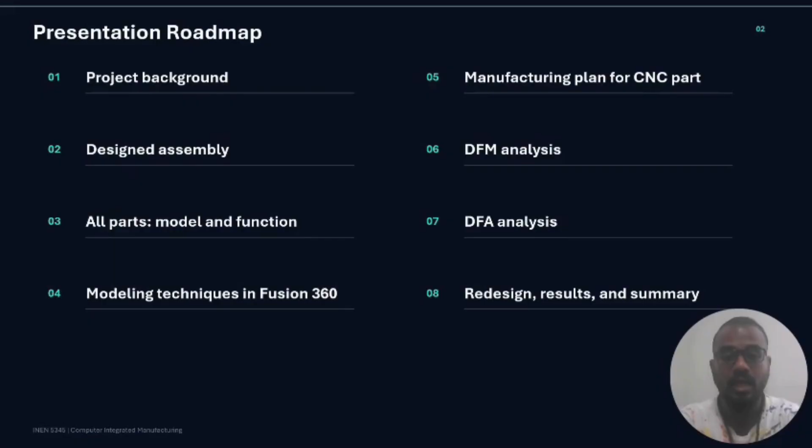The presentation roadmap is given: the project background, design assembly, all parts, model functions, modeling techniques in Fusion 360, manufacturing plan for the CNC part, DFM analysis, DFA analysis, redesign, results and summary.

The project background and the problems: why the standard bowl is limited and why we chose this ergonomic modular pet bowl. The problem we identified is that most standard pet bowls are fixed in size and fixed in height. Usually a pet bowl is placed directly on the floor. This may work for some pets, but it doesn't support every breed comfortably.

For example, small pets such as cats, chihuahuas, and dachshunds need lower access and smaller bowl geometry. Medium and large dogs such as Labradors, Golden Retrievers, and German Shepherds may need higher feeding positions. Giant breeds such as Great Danes, Irish Wolfhounds, and English Mastiffs may need even more elevation.

One of the observations behind this project was that a German Shepherd may struggle when eating from a bowl placed too low on the ground. The dog may reposition its body multiple times to access the food. This creates an opportunity for an ergonomic and adjustable feeding product. So our proposed solution is a modular pet bowl system that allows the user to adjust the height and select the correct bowl size based on the pet.

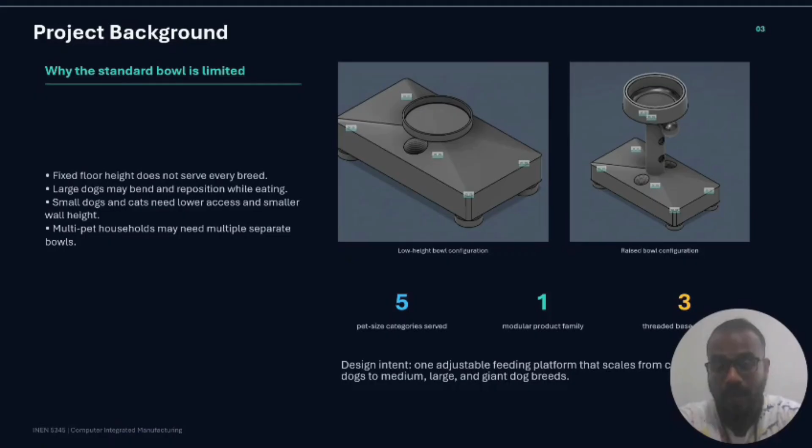For the course deliverables, we made a model consisting of more than 10 parts, all done using Fusion 360 to create the CAD parts and then putting those parts together in the assembly. This project demonstrates some of the features of CAD and Fusion 360 such as extrude, revolve, shell, holes, threads, fillets, and joints. There is also the manufacturing plan for one CNC machined part. Also, DFM, design for manufacturing, and DFA, design for assembly, were considered when planning this modular pet bowl design.

With the objectives of this project, we intended to give the customer a high-value product. The first benefit of this modular pet bowl is the key value of this product, that is height flexibility. Dogs from the Chihuahua to the Irish Wolfhound would be accommodated by this product. The two bowl sizes also make further accommodations for both small and big dog breeds. We have also given weighted support to prevent any accidental tipping caused by the pet.

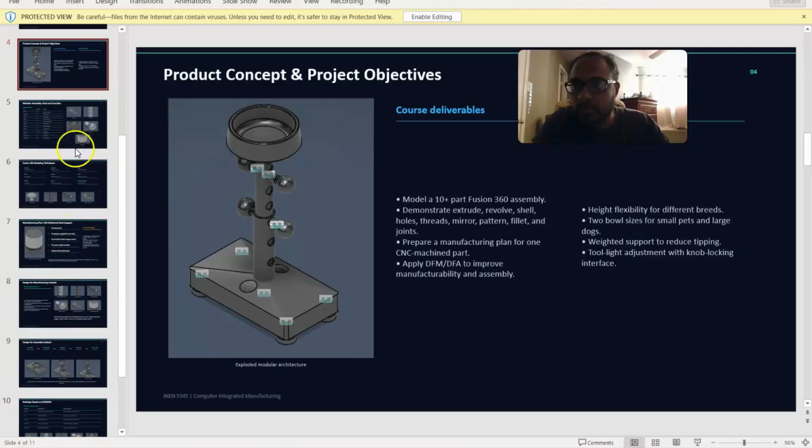And here we can see our parts and functions. For example, the base plate, which is the foundation of the entire design, has three positions or three holes where the larger pipe would fit into it. And we have the steel supports, which provide stability to the base plate. And then we have the larger pipe, which goes above the base plate and gives it the initial elevation. Then we have the small pipe to further extend that height for height flexibility.

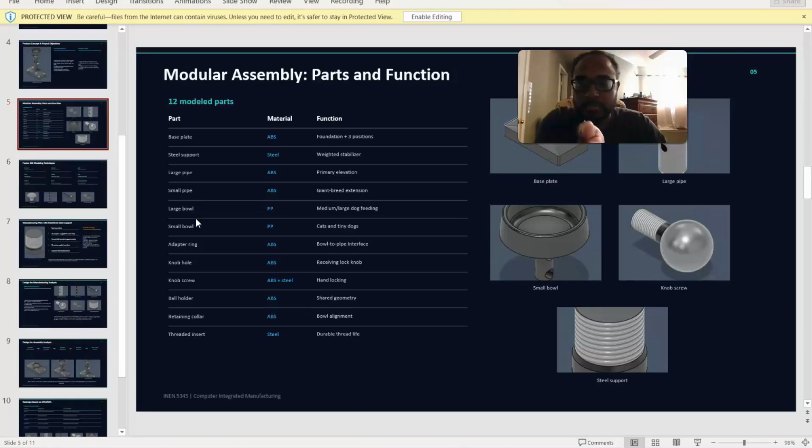And then we have the various bowls for the dogs, whether they be larger dogs or smaller dogs. The customer could take them out or put one in and replace the other depending on the dog. Of course, we also have various other components that attach to these other components.

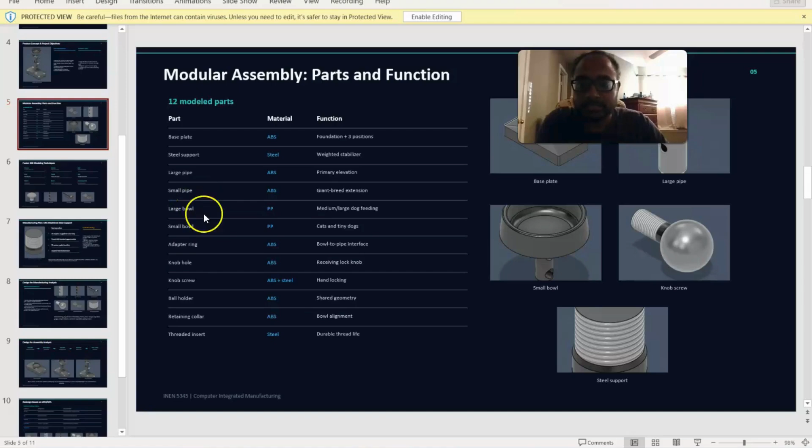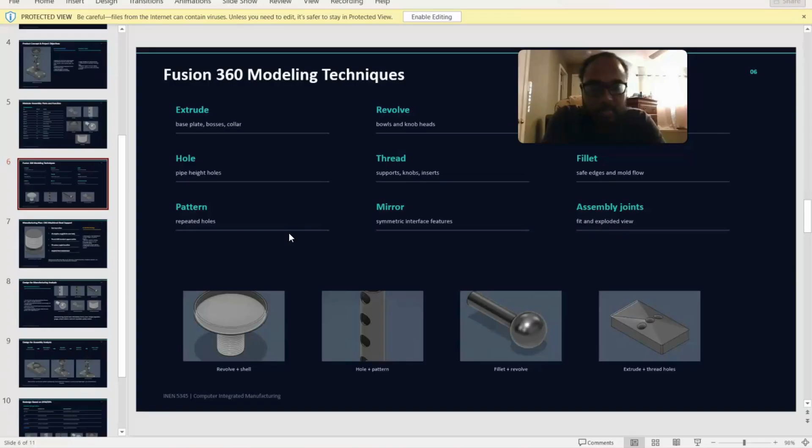Here are some of the modeling techniques used for the various parts in this project. Extrude was used for the base plate and the pipes. Revolve was used mainly for the knob heads and the bowls. Hole was used for both pipes, so height adjustment would be possible. Threads were used for supports and knobs, as well as inserts. Fillets were extensively used along the base plate, so there wouldn't be any rough edges that the pet would injure itself against.

Our CNC machine steel supports consist of 5 operations within a single setup. The first operation is to do the facing of the top surface, which gives a smooth, even finish. The second operation is the 2D adaptive finishing and the roughing of the outer body. This removes a majority of the stock body itself.

The third is to create the threads to be able to screw it onto the base plate. The fourth is the 2D contouring directly below the threaded portion over here to give it a bit of a design emphasis. And the last is the 2D adaptive finish on the outer edge on the bottom part over here.

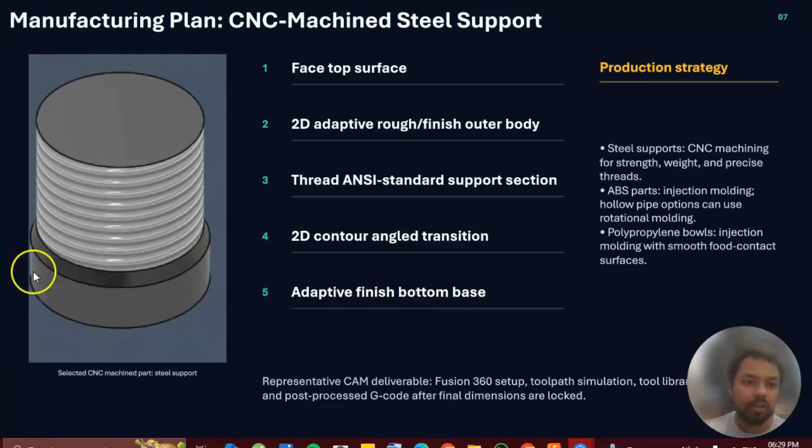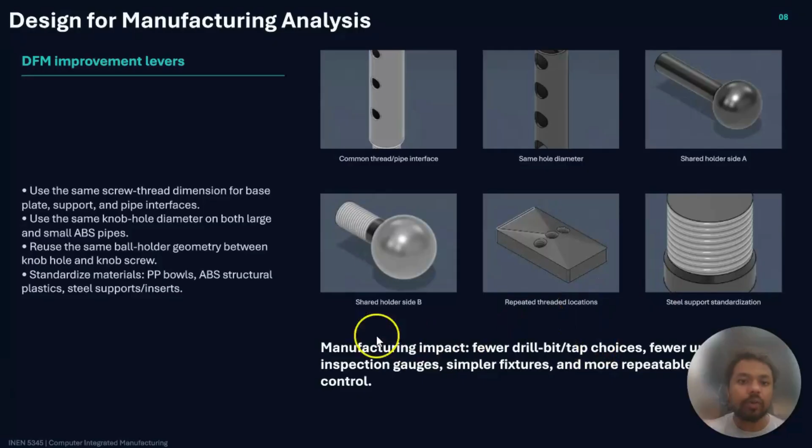We also use the same ball holder geometry on both the knob hole and knob screw as displayed here. You'll realize they use the same ball ends, so the manufacturer only has to procure this single type of ball. And last but not least, we use standardized materials throughout the entire product. What this does, it results in fewer drill bits and tap choices needed, fewer unique inspection gauges, simpler fixtures, and more repeatable quality control.

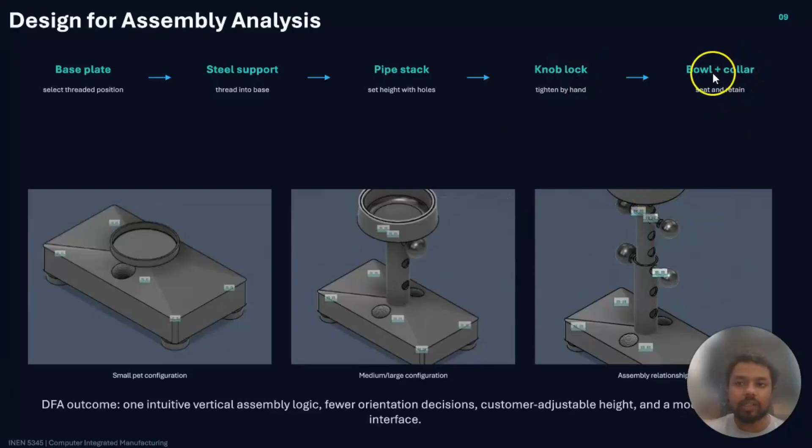In terms of DFA, the way we were able to improve on our design was to create a design that can be assembled from bottom to top, giving it one intuitive vertical assembly logic. It starts from the base plate where you put on the steel supports, followed by putting on the pipe depending on the breed of the dog, and locking it using the knob lock and screw, and finally inserting the bowl and collar to secure the entire product.

In summary, these are the improvements that we are able to obtain through DFM and DFA. For the base plate, we use 3 standardized threaded support positions. This allows for horizontal adjustability and repeated machinability because they use the same 3 screw threads. For the pipes, we use equal knob hole diameter. This falls under DFM. And we also use the same materials for the pipes. We only need to procure one type of material.

The knob system uses shared ball-holder geometry. The bowl interface uses adapter ring and retaining collar, allowing for different bowl sizes using one support family. And the threaded insert at the tightening points for the pipe and the steel supports allow for longer service life and better durability. Jumping onto the assemblies here.

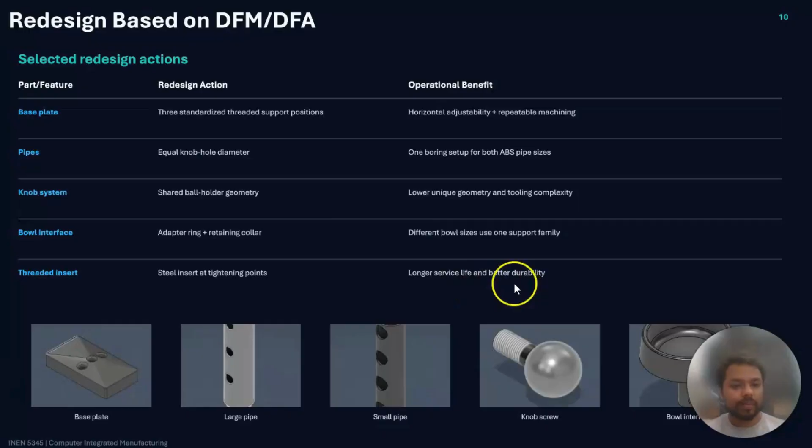This is our first assembly. This is meant for smaller dog breeds where the bowl is connected directly onto the base plate, and this can be adjusted to be put in either of the holes as shown here. You could either put it on this hole, in the middle, or on the side.

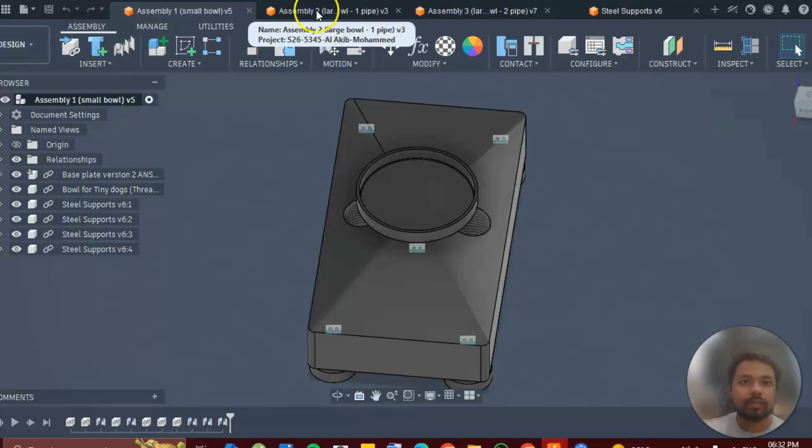This is our second assembly for medium to large size dog breeds, where there's only a single pipe connected to the bowl itself, and the pipe itself is screw threaded onto the base plate.

Our third and final assembly is for the largest of the dog breeds, where they'll have a large pipe connected to the base plate and a smaller pipe connected to the large pipe using the same knob hole and knob screw components as shown in the previous assembly. And on top of that will be a large dog bowl attached to the smaller pipe.

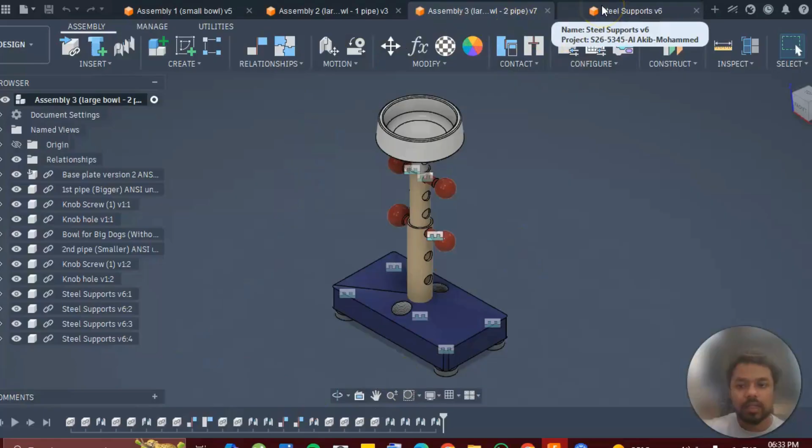This over here is our CAM component, which is the steel support. As you can see here, it consists of the 5 operations here, and if we jump on to the setup system, here's the setup that we utilized.

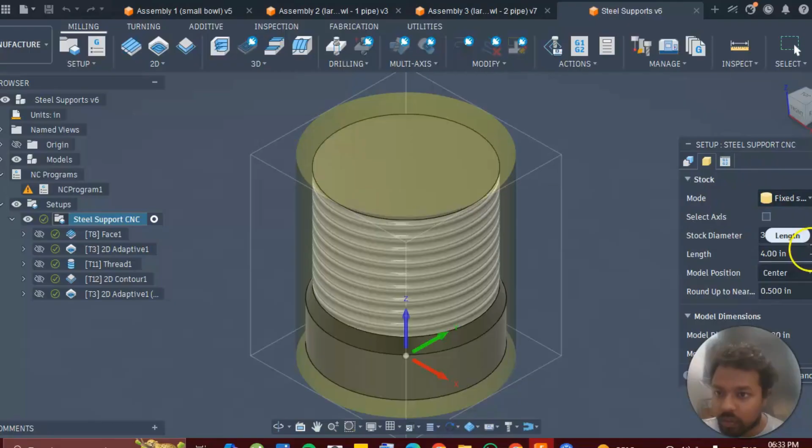Keep in mind I used a fixed size cylindrical stock over here, with a stock diameter of 3.5 and a length of 4 inches. Our origin is put on the bottom plate of the stock, and this is the name and everything as adjusted here.

In conclusion, this project assembly meets the intended design's objectives. We made the height of our modular pet bowl adjustable. Our pet bowl accommodates various dog breeds and even cats. We made the manufacturing aspect easier with standardized holes and threads. And the greatest value we added to this product is that we combined many products into one, saving the customer time and money.

The product could also be improved in future work by adding more base holes for multiple dog feeding at the same time. We could also incorporate tipping tests as well as cleaning tests and durability validation. This is the end of our presentation.